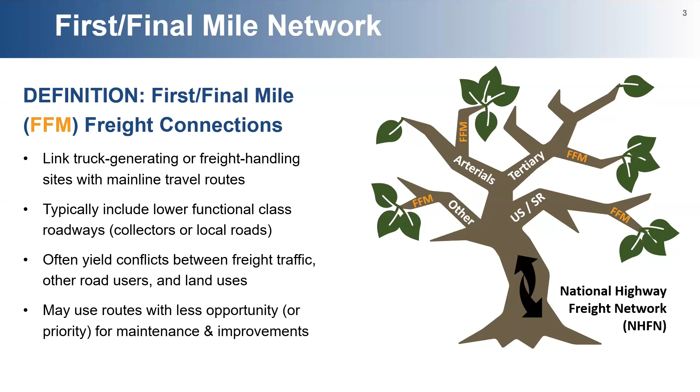The idea is looking at how things happen off the beaten path. We all know about our critical urban rural freight corridors, arterials, and interstates. As it gets further down to the lower classifications, we're getting a better handle on what's truly making up those conditions and how they relate back to our freight generating facilities. There's a lot of different characteristics we're finding, usually off of a main arterial or interstate.

It quickly transitions to a smaller road, goes through residential areas, which can lead to a commercial, industrial, business area. It's easier to relate for folks in the Baltimore area, more developed, where you see old sites - whether a manufacturing site, where I'm sitting right now, an old car manufacturing site - seeing redevelopment. So it was something, now it's turning into something else, which makes it sometimes more complicated to chase.

Bottom line, these are segments that generally start carrying a lot of multiple uses. It's not just for trucks - there's vehicles, bicycles, pedestrians. It may not have been designed that way, so it starts to have a significant amount of conflicts.

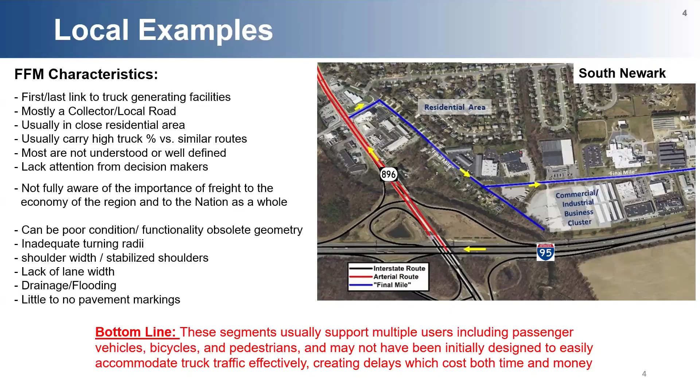Our effort in 2021 and this one was to dive into that network and see what truly makes an actual final mile connection. We looked at a six-step approach - functional classification, initial site identification, and using tools at our disposal, some point-based data on employment to find where the freight intensive sectors are. Are they manufacturing, wholesale, transportation, retail, food services - all the higher intensity, truck dependent industries - and where those concentrations connect back to the NHS or critical urban rural freight corridors.

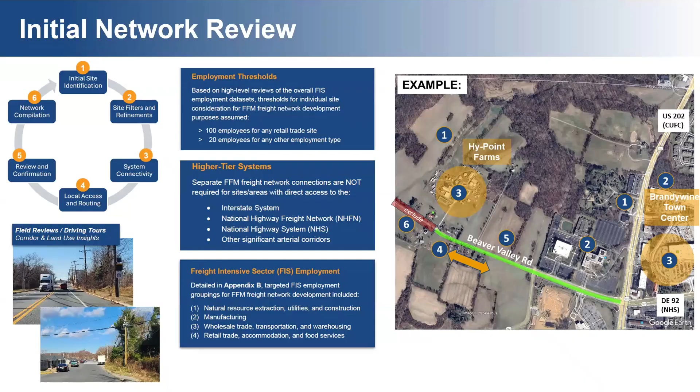For this report, I think it was a little different than the last one. I always said the 2021 report was like, can we get this off the launch pad? We know it can be rather touchy to consider whether to look at some of these and say, well, this is a freight route - that's not exactly what we were trying to get across. It was just a matter of these functioning as a final mile connection.

So the idea was once that was defined, to apply what we call a conflict screening approach, where we looked at the conditions along here - some institutional types of things about jurisdictions, but more importantly, land use. How does that land relate - is there a significant amount of conflicts?

Is it heavy residential right next to heavy industrial next to residential? That tells us there could be potential conflicts. Different mobility issues, road conditions, safety, all of those things we kind of rolled up into it and went through

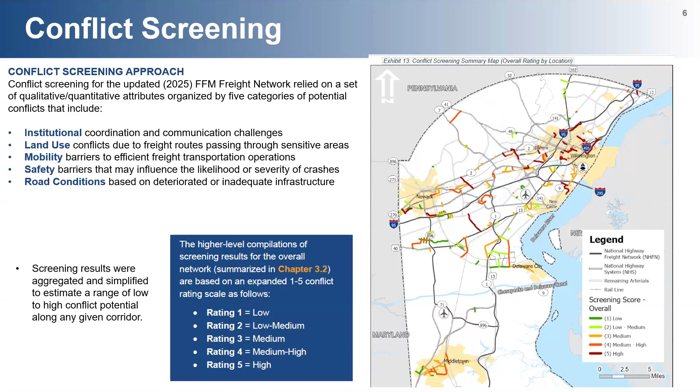a screening effort to see where we were hitting on all five of those criteria. So that map you see there, low versus high, we call it a screening. It's not a ranking, but it helped set us up for the next step.

Now that we have a little bit of underlying information about each one, from the freight perspective, we look at these in what we call protect, manage, and accommodate - what are you going to do about it. Some of these are what you call protect, where freight movement is the priority need in that area, and there's maybe not a lot of conflicts with other land uses.

So keeping that open so there is easy, better, efficient freight access and mobility where you needed to. Then there's what we call manage, where it serves a little bit of everything - probably the most complicated piece here, where there would have to be some level of considerations for being able to look at both.

Now, some of the solutions we mentioned in the rest of the report - there are places where you can do truck aprons, and other things of that nature you can put into the infrastructure to make them be able to peacefully coexist.

And then there's accommodate, where it would be a really good idea to probably separate the two types of activities, freight, and then regular passenger and pedestrian access. A lot of these come out to be like our smaller stub routes going in and out of, say, larger shopping centers and things of that nature.

So this report kind of wanted to get to that next step of just looking a little bit more at what can we do about it, or what should generally be a better framework to have these still in consideration and part of the conversation when there's improvements to be made in these areas.

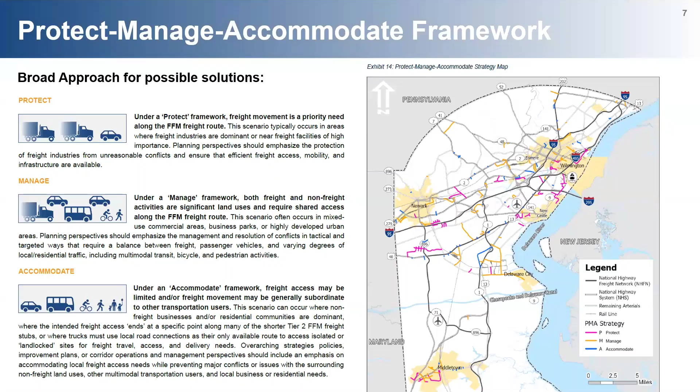So just before I hop on, we did get that approved by our council in September. I believe at the end you can see the website where you can go ahead and access that - I put all that stuff at the end. So that's been wrapped up, and once anyone wants to take a look at that in the future or have any future questions on it, be glad to answer them.

So sliding into the next thing, I'm not sure what Maryland's schedule is for your freight plan update now that it's in the current bill. What the new one's going to look like in the future, who knows? But we're kind of going steady as she goes on the update of the Delaware freight plan.

The last time we adopted it was in 2022. So we will have to have one completed, or at least to the feds as we know right now, in September or October of 2026. So we've just started kicking that off here a little bit.

Delaware, we're actually in a nice situation because right now they are updating the statewide rail plan and aviation plan. So we know we'll have lots of opportunities for sharing information, not duplicating efforts, to be a little bit more efficient on that effort right now. So it has just begun.

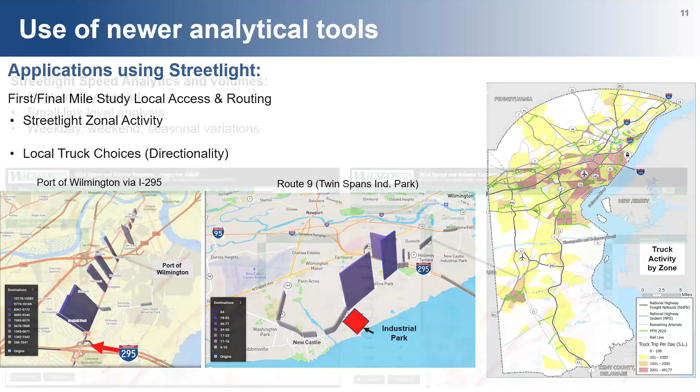We've been using it for some of our smaller studies. This is a small arterial road here where, grabbing some of the speed data, you can customize it for periods, seasonal variation, weekday, weekend, things of that nature.

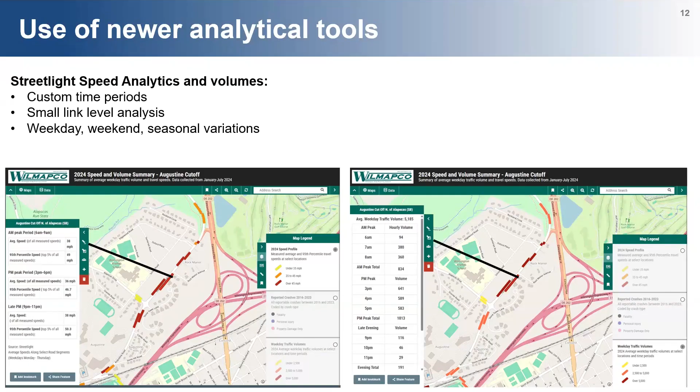Sometimes in what we call our task one or our information session workshops, we'll bring a lot of these things out to help with the public and make them interactive, so people can get a little bit more of a look and feel for some of the information coming out of those.

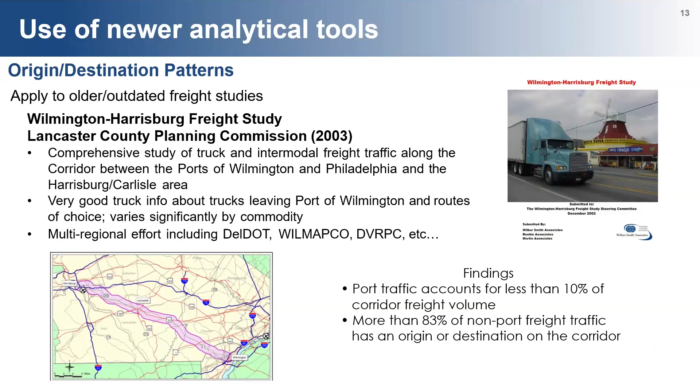But the idea was, well, is it all port related? There were some findings in there, and for those who've been around, before it was Transearch, it was Reebie Associates who was the steward of that Transearch data set. So going back in time, the idea is, well, how does this start to stack up using some of the more analytical tools we have here?

So we've been putting it through its paces, trying to figure out some of these routes—looking at Delaware and in the smaller corner there, how far do trucks go in PA that originate from Delaware? What are the stronger origin destination patterns?

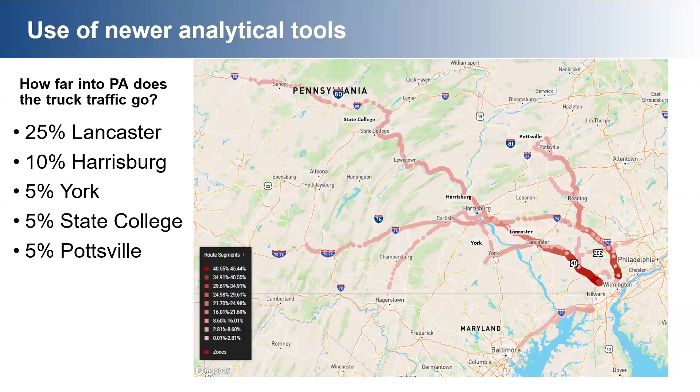We were able to peel through that a bit to figure out well, how much truly does get to Lancaster? Are there other destinations further away? To really begin to shape it up a bit.

And this one here is just looking directly from the Port of Wilmington, literally from Hausel Road—every truck leaving there, what direction does it go? So we're able to go back at some of those studies and take a better look at truly how much makes it to different locations from the port.

You can look at a larger area, the entire city, all of that. But we've been trying to hone it a little bit more to see how it can handle that routing ability and give us some better intel. More importantly, even some of the modeling work that we do—how can this stuff start to look at county to county flows and see how things go from one county to another through trips and whatnot.

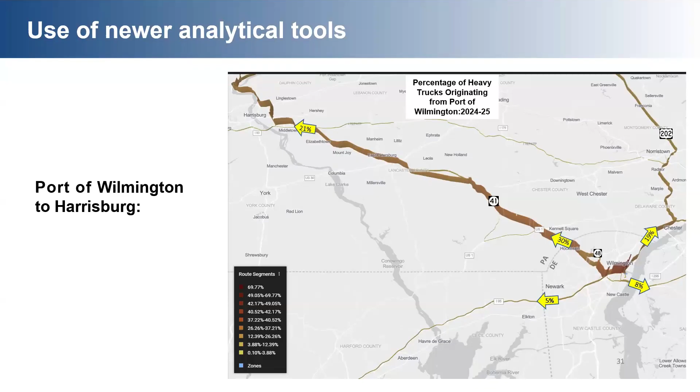One thing we're looking at bringing into our freight plan right now is a larger scale look at the I-95 Route 1 interchange near the Christiana Mall, everything that accesses Route 1 south from the trucks, and how they fan out amongst the peninsula.

The idea is to see how much is truly through traffic that gets all the way through Delaware, how much branches off on New 301 toward Annapolis. We're able to look at these larger scale truck movements, which give you a basic supply chain study.

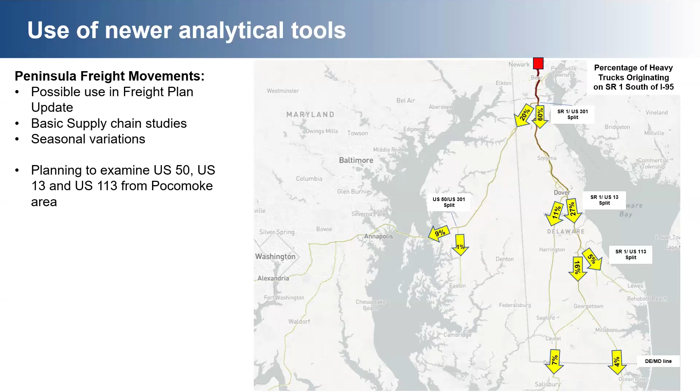On how different routes are used and what areas they truly service. So we're going to look at the same flow from, say, Annapolis, US 50 into the peninsula, and from Pocomoke as well, to get an idea on how things fan out within the peninsula - basic truck flows.

The last thing we're tackling, the latest one we've gotten our hands on - we haven't even selected the firm yet - is a logistics fulfillment center transportation land use study for New Castle and Cecil. Essentially we're addressing the expansion of fulfillment centers and e-commerce.

We've heard from our land use agencies about the ITE codes and whether they're truly accurate - maybe that's the easiest way to say it. Part of this will be getting an understanding of the landscape within the region, an economic analysis of what we're looking forward toward in the future.

Task number three is a traffic assessment, probably the biggest piece of this puzzle - to look at those ITE codes and see if they really match what's being asked for land use transportation improvements from the land use agencies, and whether we're analyzing that effectiveness as well as we can, including how we look at truck improvements for those locations.

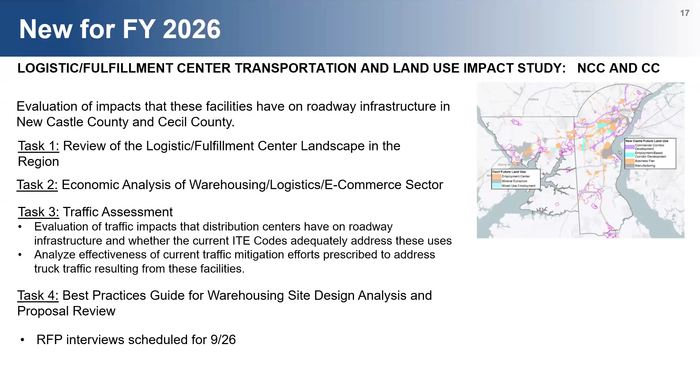So those are the things keeping me busy on the freight side in the Wilmapco region. Here are a couple links that can get you to the freight plan, and our goods movement webpage has all the material you'd want to access, or you can simply reach out to me and I can get you what you need.

Thanks, Dan. Yeah, it was really good to hear that update on the first and last mile. It looks like we have a question.

So about the oversized overweight - yeah, I do not know, that is a question. I'm trying to see if there's anybody here from DelDOT on the call. I have not heard anything, so my initial thought would be probably not, but I can certainly find out from Bruce on that.

Okay, yeah, if you can follow up on that, that'd be great. Any other questions for Dan?

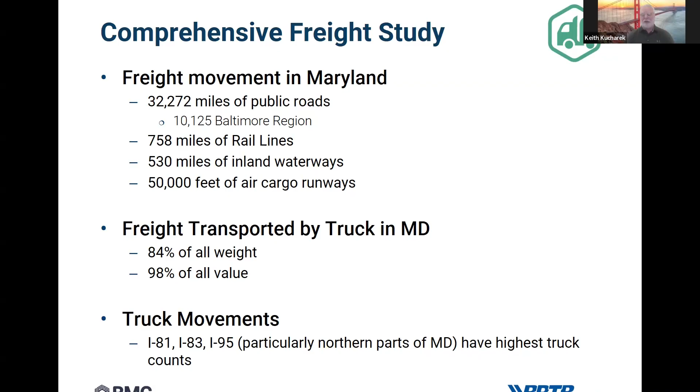The purpose of this freight study at BMC is that we have 4 different tasks associated with this project, and I'll talk more about each individually. The first is looking at some of the truck parking issues we have. I know there have been 1,000 different studies on truck parking and 1,000 different concepts developed for them, but what's one more? It's not going to hurt. We think we can tackle some of the problems and maybe come up with some unique solutions.

The second task will be to find out what other MPOs are doing as far as freight initiatives and best practices. Then the third task will be to look at the regional impacts from the completion of the Howard Street Tunnel and the expansion of the Sparrows Point Container Terminal.

Finally, the fourth task will be asking our consultant to provide details on how we might put together a Baltimore Freight Finder, similar to the Philly Freight Finder. If any of you have been on these calls for a while, probably about a year ago we had a presentation from...

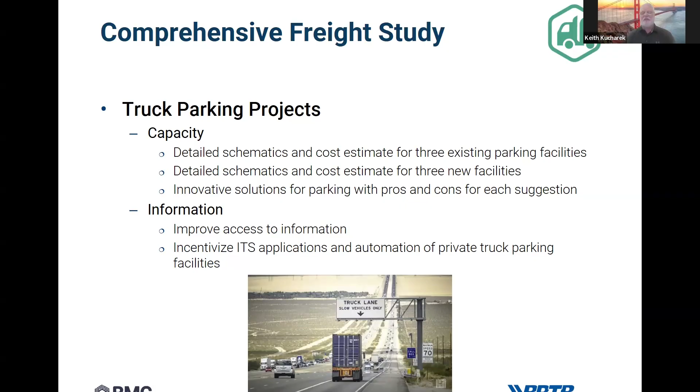As far as informational improvements, we're going to get our consultants to talk about how we can improve access to freight information, and talk about private truck parking facilities as well, and the ITS applications of truck parking at private facilities.

The next part of our study will be an overview of best practices at other MPOs. We'll be conducting interviews with similarly sized MPOs. Smaller ones have their issues, larger ones have their issues, but we want to focus on MPOs that are of similar size to ours here in the Baltimore region.

Some examples of what we want to find out what they're doing in other areas include truck parking, their freight plans, performance measures, things like that. That will all culminate in a technical memorandum outlining the information they came up with during the interviews.

This is a big one we wanted to tackle, because with the completion of the Howard Street Tunnel and the planned Sparrows Point Container Terminal expansion, there's going to be a lot of changes to truck patterns. So we're going to have our consultant develop another technical memorandum outlining the changes in truck patterns, and also auto traffic, and how truck speeds, road capacities, and safety are all affected by these two improvements.

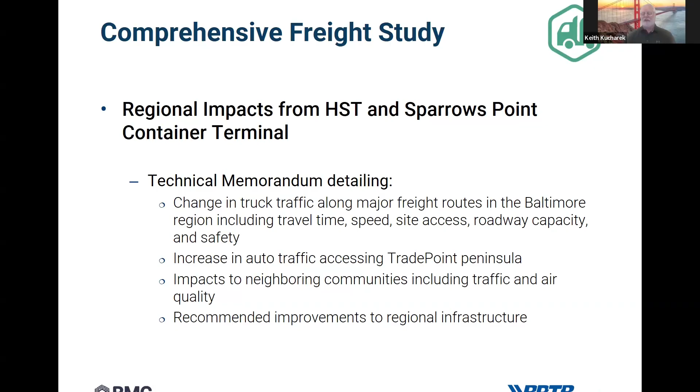I touched on this during the introduction, but the Baltimore Freight Finder is another thing we want our consultants to give us detailed analysis on, what it'll take to develop a regional freight locator tool such as the Philly Freight Finder. The intention is for it to be an online interactive freight sharing network, expanding the reach of freight planning efforts for all our freight partners, including regional planners, economic developers, and the general public. It could even benefit the trucking community. It'll help us with data sharing and support local and state planners searching for knowledge on freight around the region.

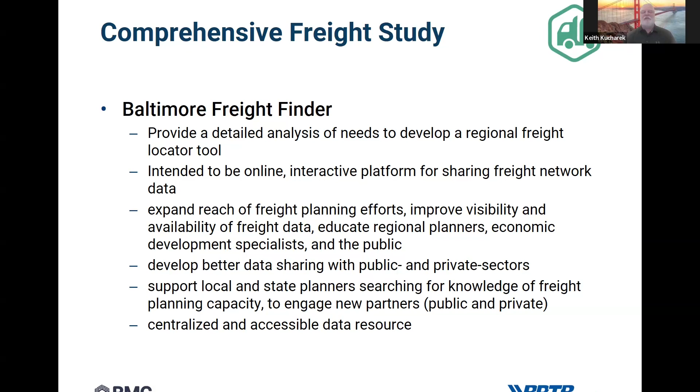So that's the overview of the freight study. If there's any questions, we'll be working to select a consultant and have them on board to start this work in October. Probably maybe six months, maybe two freight movement task force meetings from now, we'll be able to provide another update on the information we've discovered through this study. So if there's any questions, I'll be happy to take them.

I'm going to stop sharing, and hopefully Jason is here by now. And he is. So are there any questions on that study? No questions. I always like no questions.

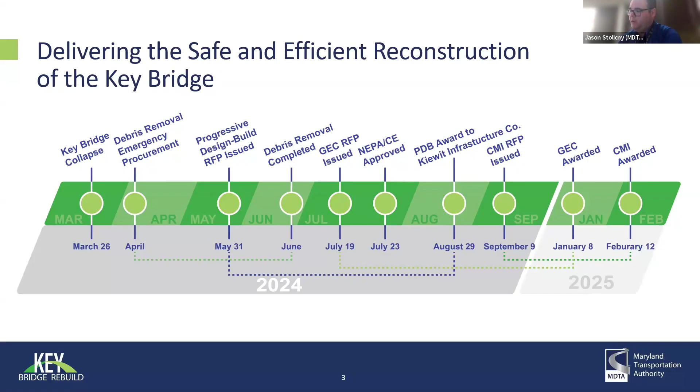All this occurring at the same time as we were working through the NEPA process, getting our categorical exclusion approved in July of last year as we worked through the emergency response program. So that was all happening concurrently, and we ended up with the selection of a progressive design builder, the team fronted by Kiewit Infrastructure Co.. We've been at it with Kiewit for just about a little over a year.

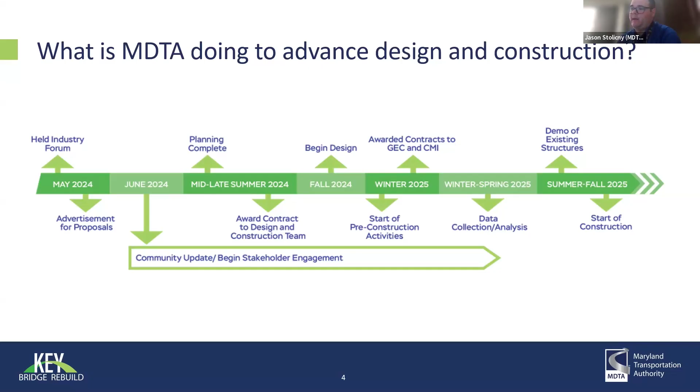With the fall of 2024, the design began, moving into the winter of last year, where we started a large amount of field work - geotechnical investigation, surveys, bathymetry, utility designation, everything you need to start the base foundation of your project - working through processing and analyzing that field data earlier this year. That led us to the demo contract and the demo work that we awarded earlier this summer, and hopefully starting construction later on this fall.

With the emergency response program and some of the guardrails set up through that program, we're able to replace, with the support of the federal government, what was lost in the allision. That essentially means we are able to put back a bridge and have the federal government participate in the funding of that replacement project. But the bridge has to be essentially the same as what it originally was, which means 2 lanes in either direction, although we're able to take those core elements of the bridge and bring it up to modern standards and account for growth and changes at the port, both now and in the future.

We have a couple of visuals here that I'm sure everybody's seen at this point about how we anticipate the bridge to look as it crosses over the federal channel here on the way into Baltimore.

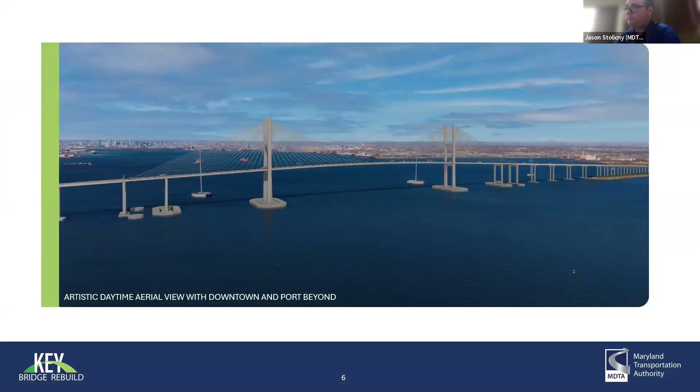With the cable-stayed design of the new bridge, that's necessitated the main bridge towers becoming much, much taller - over 600 feet tall once they reach their maximum height. That allows us to push back those 2 main pylons to being 800 feet on either side of the federal channel center line, about 400 feet more than the previous bridge. And just as the main section gets wider, so does the entire bridge length - the bridge will be over 3,300 feet as well.

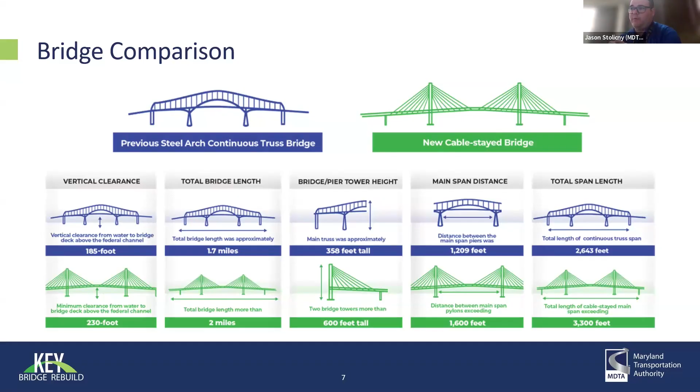Pre-construction activities, we sort of touched on this at the start as well. We've had a pretty extensive geotechnical investigation program, both on land as well as in the water. We started that program earlier this year and ran through the investigation. As a result of some of those investigations, we ended up making some design decisions that will go into a little more detail later on. This allowed us to keep the project progressing forward and take into account some of the geotechnical data that we were able to glean from the process.

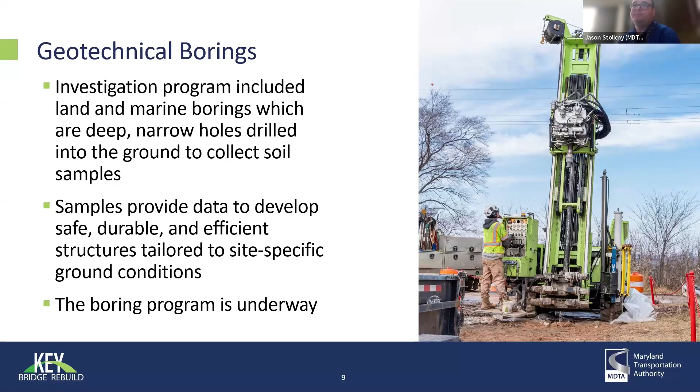Any bridge of this size or scale is required to do specific wind tunnel testing, which we're doing with a company called RWDI outside of Toronto, Canada. They work to build different elements of the bridge as well as a 1-in-20 scale model where they have a wind tunnel and they test the different elements in order to ensure that there's no eccentricities or amplification issues, in order to make informed design adjustments to address any potential field issues as a result of building this bridge that is going to be quite tall and will be a unique element in Maryland.

Along with this, they also break down the bridge into different construction phases as well, so we get to test the bridge at every stage of construction to ensure all those major milestones will be accounted for, and we'll be able to progress the construction without any unanticipated stoppage.

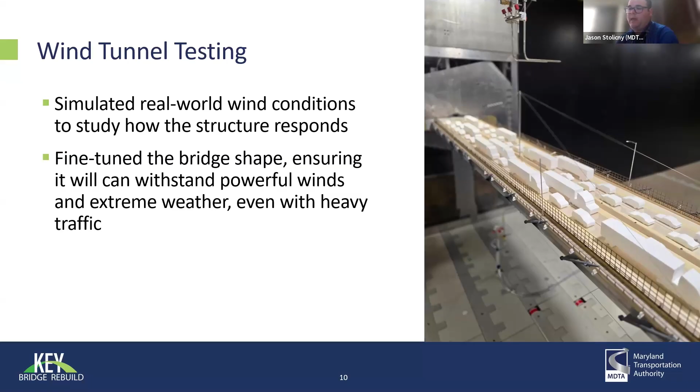With this as well, and due to the size of our foundations accompanied with our vessel protection, this has led to special modeling being done with the Turner-Fairbank Research Lab down in Fairfax. We're partnering with Federal Highway on this, where they are doing specific modeling in order to test the scour conditions at our pylon and main span piers. We have 8-foot steel pipe piles that we'll be installing for all of our main structural elements, and this is beyond some of the key or standard inputs that we have in the research. Turner-Fairbank within Federal Highway is doing project-specific research, and we're about wrapping that up, and we're seeing good results as far as the actual modeled scour versus what we had predicted and assumed in design. So again, it's more ensuring that our conservative assumptions made during initial design development are validated and we're able to move forward without any delay.

We mentioned the test pile program. The test pile program allows us to field test our foundation assumptions. These are piles being fabricated—I think these are actually up in the harbor now, or in the Patapsco now. These are 220-foot long, 8-foot steel pipe piles that will be the main foundation of the bridge towers. The test pile program allows us to test the axial load capacity of those 8-foot piles, as well as do a lateral test to see how much side force or side resistance they would provide, which provides various inputs into the design. We've made assumptions, and this allows us to get a proof of concept with the initial 12 piles on the project. We anticipate our first pile driving to happen within a week from today, either likely later this weekend or maybe sometime early next week, depending on the weather.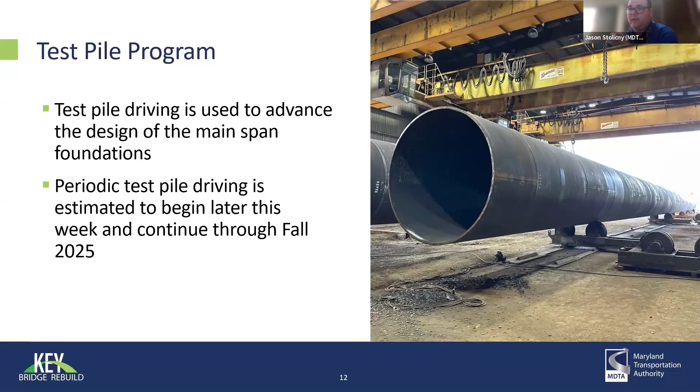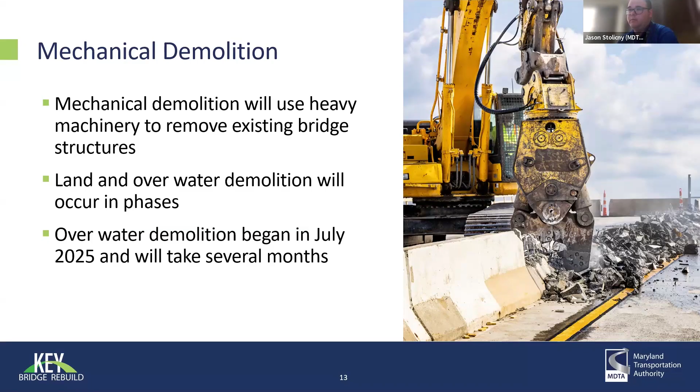Concurrent with this, we are working through demolishing the bridge deck and the land-based portions of the bridge. That started in early July and is going to continue over several months. We're at the point where we've removed all of the median barrier, the bridge parapets, and have taken off the entirety of the deck on the southern portion of the bridge. We're working our way to remove the deck on the northern portion of the bridge. Following that, we're going to start picking the steel off of the remaining portions of the bridge and get it down to a couple feet below the finished grade. That will continue into Q1, Q2 of 2026.

As I alluded to earlier, with the geotechnical investigations and our field investigations, we were able to identify some pretty substantial potential conflicts with our original bridge alignment. The original categorical exclusion had language requiring us to be on center line of the existing bridge. Through that investigation and through some design adjustments, we shifted the main span portions of the bridge without really changing any of the geometry or key design elements of the bridge itself, and modified the approaches in order to avoid those obstructions, which would have added cost and additional delay. This allows us to maintain schedule, and we were able to make this swift adjustment without any real schedule impacts.

This revised alignment remains within MDTA right-of-way, and I think that most folks who end up using the bridge, it'll be an imperceptible difference. There's just an additional curve as you're coming across the northern peninsula.

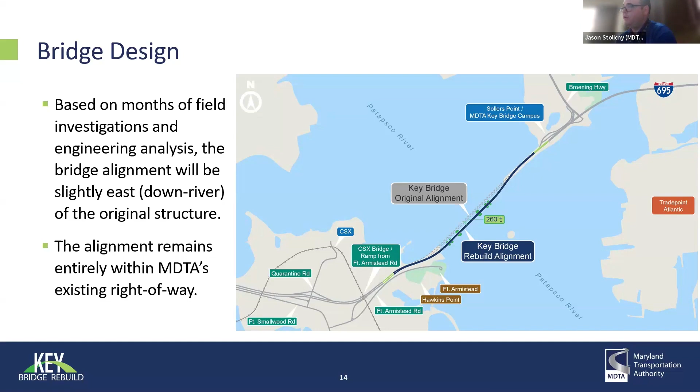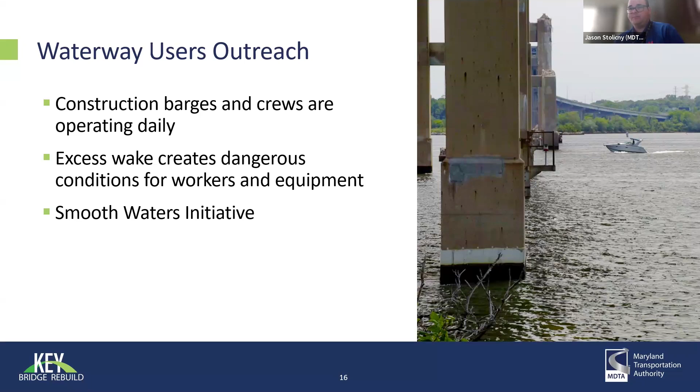So ongoing initiatives with the project, and with substantial work within the Patapsco and the approach to the harbor, we're going to have a lot of construction crews, equipment, and various ancillary elements in the waterway. One of the benefits of speaking to groups like this is that we want to get out the word that we need to treat the waterway like an active construction zone, and do what we can when piloting vessels or using pleasure craft to minimize the wakes we're creating, because wakes create dangerous conditions for workers. So we have a Smooth Waters initiative underway to get that word out through local marinas and hobbyist groups, but we want to reinforce that here as well.

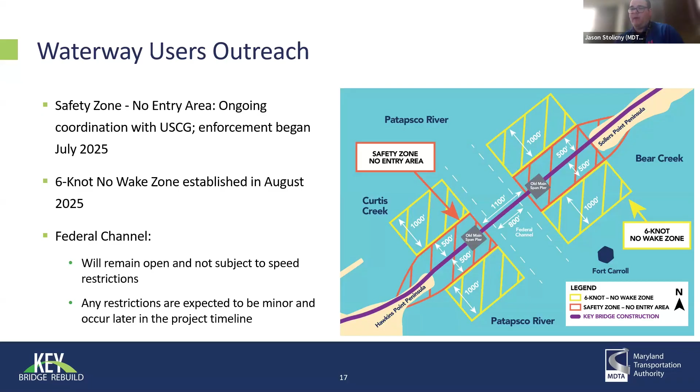We've worked with the Coast Guard and the Army Corps to establish safety zones and speed limit zones in and around the work site. We have specified no entry areas directly adjacent to the construction work, and then a 6 knot no wake zone that extends about 1,000 feet beyond that. Ultimately, the federal channel is outside of any of these restrictions, and the main shipping traffic into and out of the harbor remains largely unimpacted by the work happening now.

We have our webpage, keybridgerebuild.com, with lots of information on it. We're also undergoing a refresh, so we encourage you to look there both now and in the future, where we have fact sheets and partner progress information about the activities we have going on now, including demolition, noise and vibration monitoring, the changes you're going to see, and how to get in touch with us if you wanted us to come out and speak to any of your HOAs or other industry groups. We're always happy to come out and engage.

Ultimately, this group and Melissa's group has been working to engage with the public, listen, and try to get as many connections as we can, because we want to make sure people are aware of the project, aware of what's coming up, and aware of where we're going. So we attend pop-up events throughout the year, and if you are looking for any attendance at a community meeting, a community event, anything like that, we're always happy to attend and try to spread the word about the Key Bridge Rebuild as well.

Melissa, do you have anything you want to say about outreach or engagement?

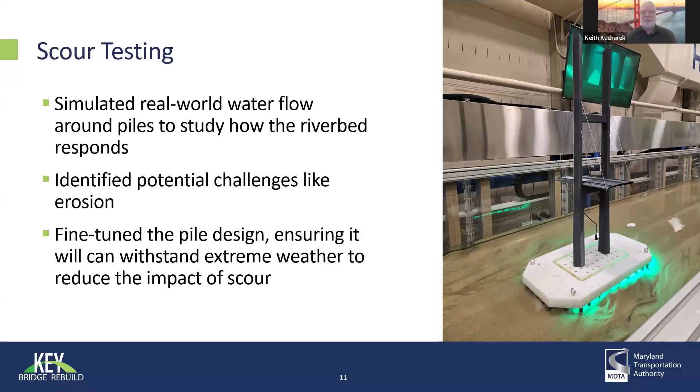Thanks, Tina. Any other questions? No? All right, well, thanks, Jason and Melissa, I should say. Appreciate you guys giving us an update on where we stand and where we're heading.

I think that's all the presentations we have. Is there anybody else that wants to discuss anything or let us know what's going on? JT, looks like your hand's up, maybe? Or are you just stretching? Saying hello. Hey, Keith. Okay.

Hi, everyone. Couple things. I put in the chat box that the state freight plan is going to be updated generally in the same time schedule as Delaware's. So we're going to kick off this fall. Most likely Aviva Clue here and the Office of Planning and Secretary's Office will lead that effort with some assistance from some state highway contracts. So stay tuned for that.

Also, the State Freight Summit, because of some change in speakers at the last minute, has shifted from October 9th to December 8th. That actually allows us to get some speakers that we wanted for October to actually participate, so we're pretty excited about that. Stay tuned. If there's anybody on this call that doesn't have that invite and is interested in participating at the MDOT headquarters in Hanover, let me know or let Keith know, and we can forward you that invite.